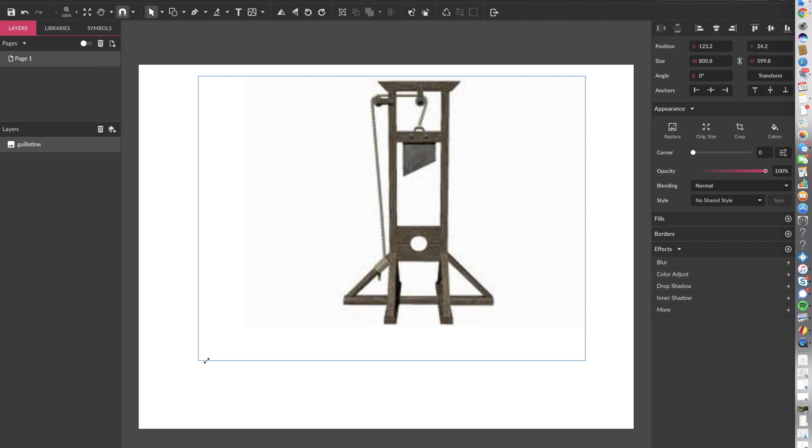Okay, so then we're going to resize this image so it's workable. We got a picture of a guillotine, like a real guillotine, an existing one. Look for one that had a picture straight forward from the front, so that the dimensions, at least the ratios of dimensions, are still held, as opposed to one that they took a picture of the guillotine at an angle, or up or down, or left or right, or any combination thereof, where the ratios would not be as reliable.

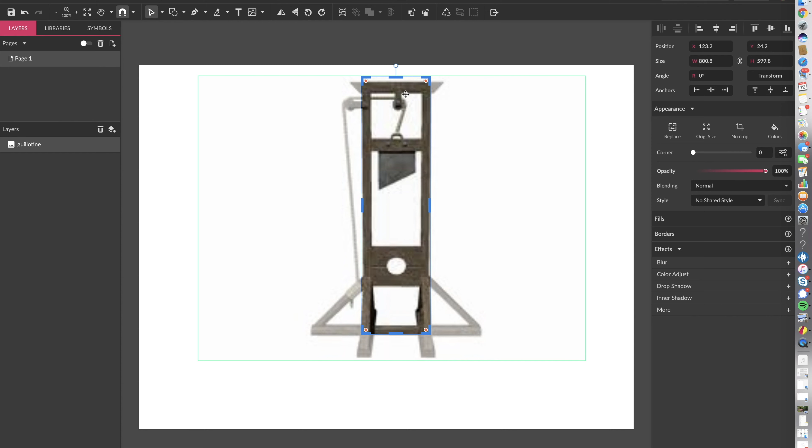So what I did here is just cropped the image of the guillotine to see how many pixels high the guillotine was. You see over here in the image size section that it's 144 pixels wide, 534 pixels high. And then quickly we can go and tell how many pixels high the head hole is, which is 144. And then subsequently we can check out the height of the legs that come off the bottom. You see those are at 119 pixels. And so that'll be enough to give us our ratios of how high to the width that you need to make it the right size.

To maintain the ratio of the original one that you're designing it off of. Okay, and then we're gonna go quickly look up a picture and see how exactly it's built, and then we're gonna go ahead and design the thing.

We'll draw a picture of it as a schematic so that we can define the variables that we'll need to find in order to maintain the ratio, right? So here we go, reconstructing the guillotine in picture form here, and then we're gonna do some design, and I'll take you through the design process. So we're gonna make sure that when we're making our drawing, we take note of what we saw in the picture that showed the design of the existing guillotines, and we reproduce that here.

We're gonna draw it from the view of the frontal plane, and then we'll draw a side view, and that way we can define every single piece of material that we need to build the guillotine, to reconstruct the design of the guillotine. And then we'll do some math and figure out exactly how big each piece should be, how long each piece should be.

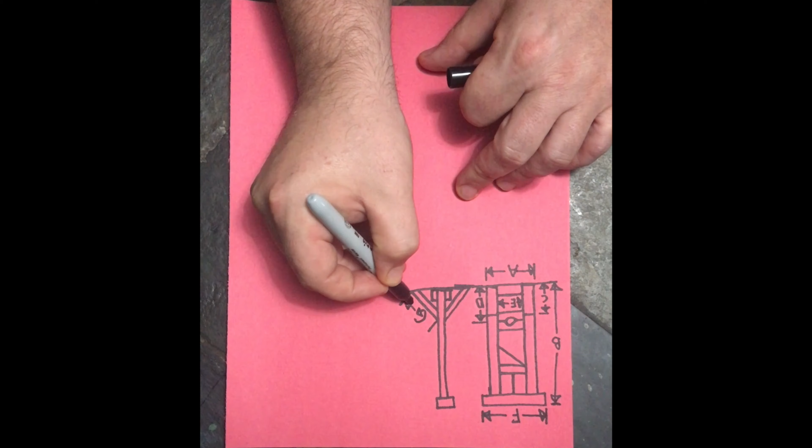We'll end up with a bunch of variables of the different pieces of the guillotine build, and then we will base our calculations on the ratio of the existing guillotine that we got from the graphic design software and the image of a real guillotine. And then we will also plug in our design value, right? So in this case, I want this guillotine to be 3.5 feet tall.

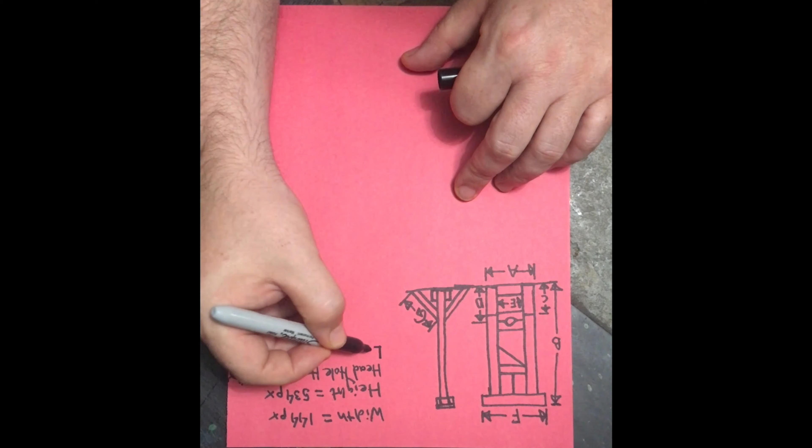That's what works best for my costume. And so going to be using a height of 3.5 feet. And then the ratios that we got off the graphic design software of the existing guillotine to find out what each piece of wood should be.

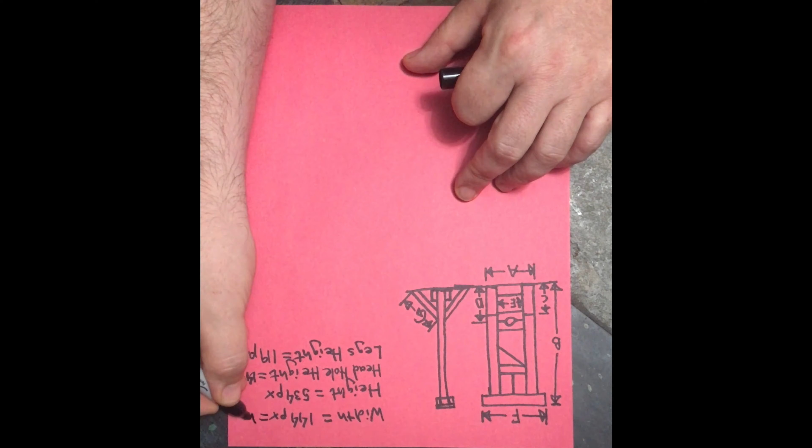Actually, in this case, I'm going to be using PVC lumber. Using the data that we got from the graphic design software, the existing guillotine, we'll find out the height to width ratio, and we'll go ahead and find the height of the head hole relative to the total height of the guillotine.

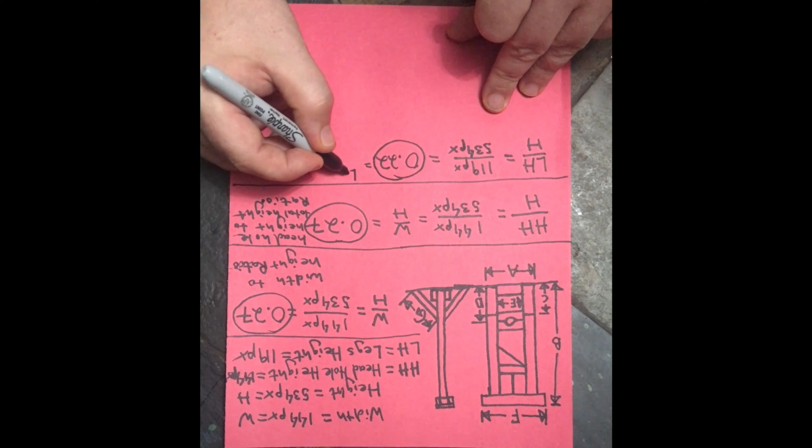Another factor we'll need to know is the height of the support legs relative to the total height. That will help us define A, B, C, D, E, F, and G, which we'll solve for in terms of B, our design height. Using these three ratios will help us define these variables as well.

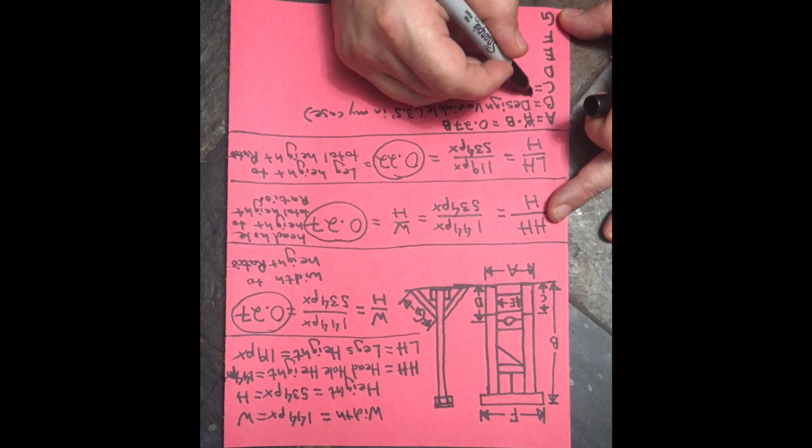A is the width, which equals the height times the width-to-height ratio, giving us 0.27B. C is the leg height ratio times total height. D is the head hole ratio times the total height.

Now let's find G, which will be a bit trickier because it uses some angles. We'll have to pull out some trigonometry here. Let's make an exploded view of G, one of the legs. We'll define it as a right triangle using G as the hypotenuse and C as the equal sides, using our definition of cosine.

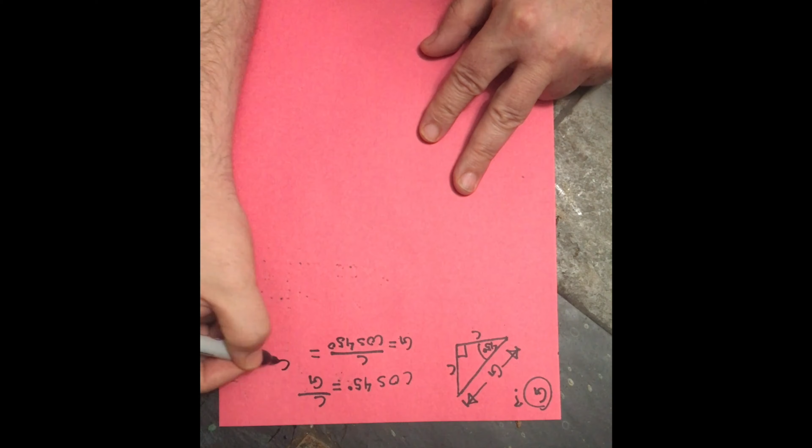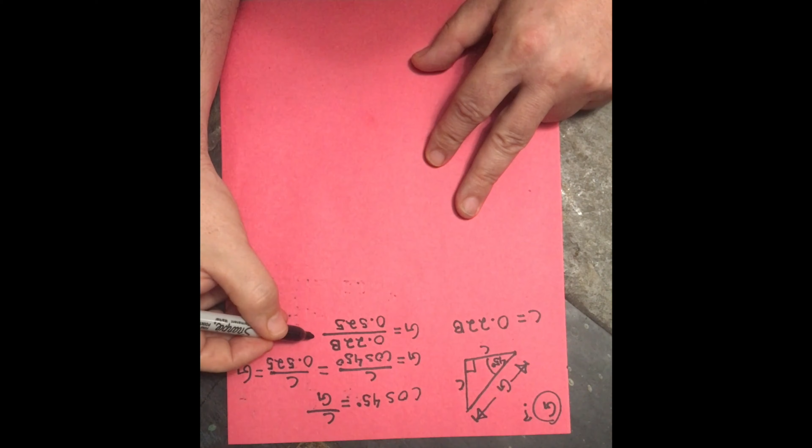We know this is a 45-degree triangle, with angles of 45, 45, and 90 degrees. If we take cosine 45, which is adjacent over hypotenuse, and solve for G, we get 0.42b.

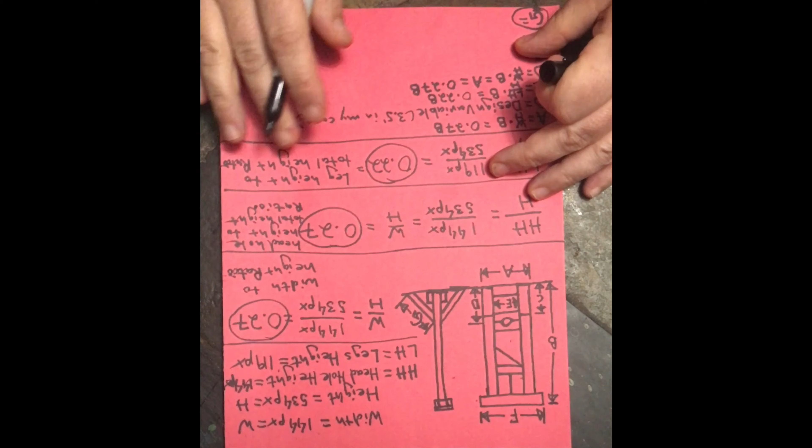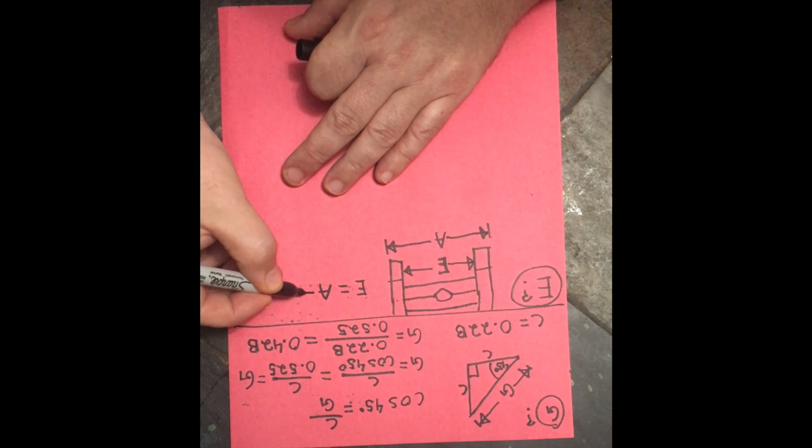Okay, finding E is a little simpler. Let's look at the exploded view here. We have to calculate in the width of our material, which we'll call H. It's another design value you plug in depending on what material you're using. Then simply subtract 2 times H from the total width.

Similarly for the top piece, this is sort of like a traditional guillotine top design. I'll put a width of H, an overhang of exactly one material thickness on each side, which should look nice. So we take the width of our guillotine and add 2H.

You get 0.27b plus 2H. Rewriting the variables: B is the design height, H is the board width. So we have all of our variables defined in terms of B and H now.

Now all we have to do is plug in our values for B and H, the height we want and the width of the material. In my case, I'm using 3.5 feet height, and for the width of the material, 2.5 inches. Let's solve all the variables using those design values, and then you can easily figure out the dimension, the length of every piece of material needed to build the guillotine.

So A will be 1 foot, B will be 3.5 feet, C is 9 3/8 inches, D will be just about 1 foot, E is 7 inches, F will be 17 inches, and G is 17 13/16 of an inch. Okay, now let's redraw our design here.